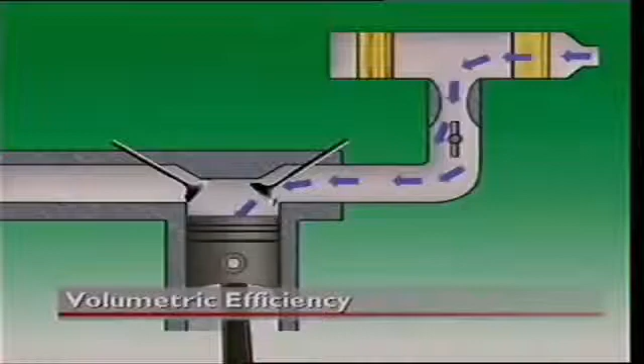Volumetric efficiency compares the volume of air entering a cylinder during intake to the internal volume of the cylinder when the piston is at bottom dead center. It is usually expressed as a percentage. In a naturally aspirated engine, one without forced induction, volumetric efficiency can never be 100%. This is because of the resistance to airflow that occurs at the carburetor, manifold, and the intake valve.

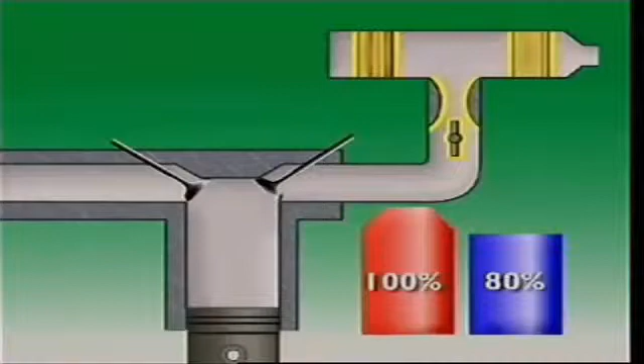With forced induction, the incoming air is compressed so that a greater volume and mass of air is forced into the cylinder during the intake stroke. That takes the volumetric efficiency to above 100%.

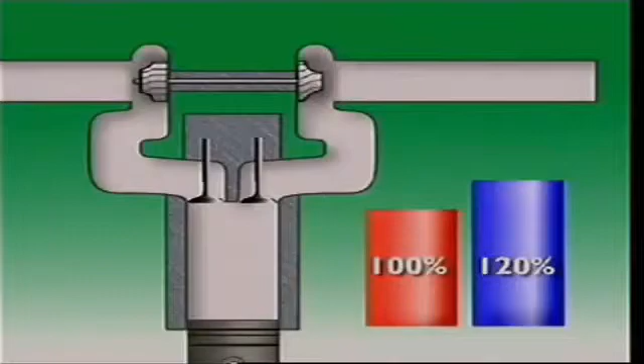Sound travels through the air by producing pressure waves, areas of high pressure and areas of low pressure. The rate at which these waves reach our ears is called frequency. It is measured in cycles per second, where a cycle is the distance between waves or wavelengths. The higher the frequency, the higher the pitch of the sound.

The range of human hearing is approximately from 20 cycles per second to 20,000 cycles per second. An engine produces sounds across a wide range of frequencies. The mufflers and resonators in the engine exhaust system reduce these sounds to an acceptable level.

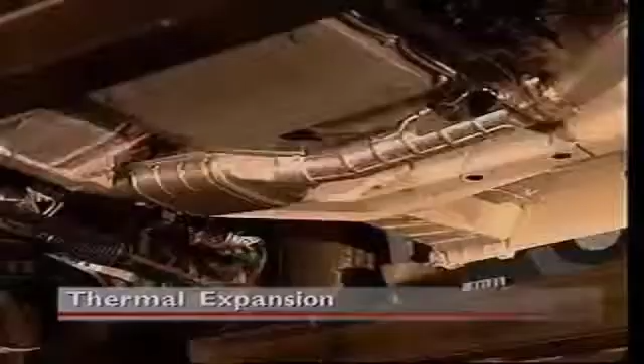Thermal expansion refers to the way some materials expand when they are heated. The same amount of heating can produce different amounts of expansion in different substances. Components that are subject to heating have to allow for this expansion in their design. An engine exhaust system is subjected to very hot exhaust gases, so its components expand and contract as they heat and cool. Mountings in the system are designed to allow this to happen.

A resonance is a form of echo. Sound waves or vibrations in one object cause sound waves or vibrations to occur in another. The induced vibration is sometimes called a sympathetic vibration, and the second object is said to resonate.

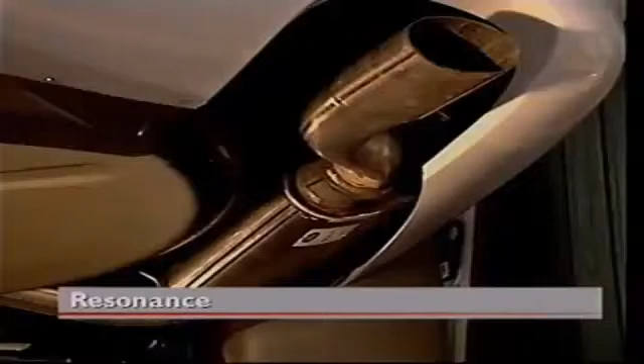It can become a problem if the sympathetic vibration adds to the original vibration. In an exhaust system, that means more sound waves, which means more noise. To reduce this, a resonator is fitted in the exhaust to act as a sound dampener and reduce the effects of the resonating sound waves.

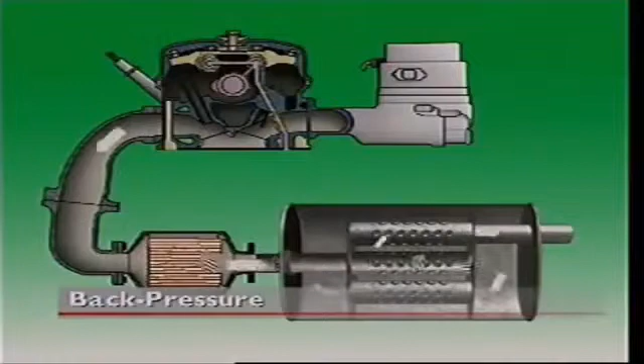Back pressure in an exhaust system refers to a buildup of pressure in the system that interferes with the outward flow of exhaust gases. This area of high pressure acts as a kind of wall to stop gas flow. It can be caused by a blockage in a muffler or a similar restriction.

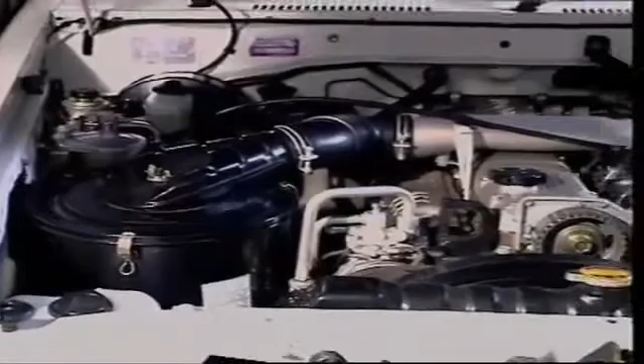This section examines the diesel induction system, beginning with the four-stroke engine. The two main components of the intake system are the air cleaner and the intake manifold. But in a diesel engine, since fuel is delivered separately and the intake system carries air only, there is less restriction in the intake of air than in a carbureted system. Also, since the diesel engine doesn't have a carburetor, it has no throttle plate. Some diesels use a pneumatic governor with a butterfly valve at the entrance to the inlet manifold.

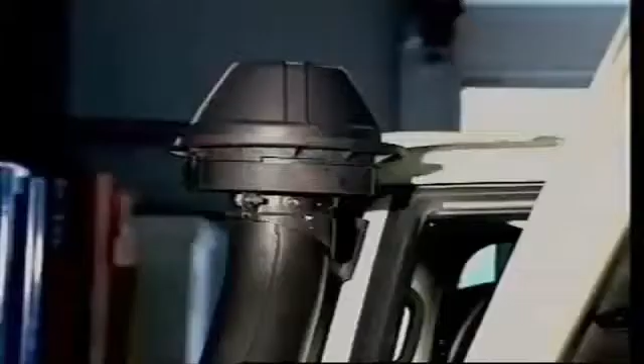Diesel engines often have more than one air cleaner. The intake system of the diesel engine can be used to increase engine output. This can be done by increasing volumetric efficiency, that is, by increasing the amount of air that enters the cylinders. Output can also be improved by using large, free-flowing intake manifolds, and by increasing the number or the size of inlet valves per cylinder to admit more charge into the combustion chamber.

Another method is to use forced induction or supercharging to pressurize the intake air and force more air into the cylinders.

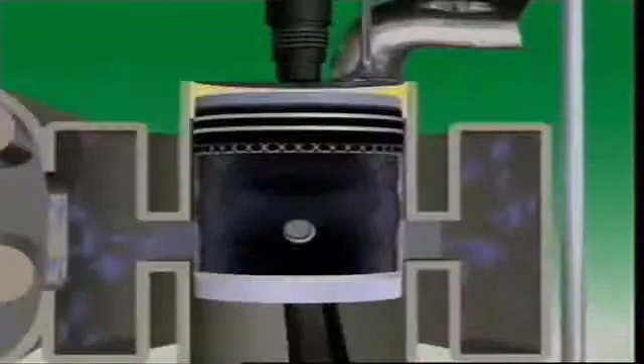Let's look at the intake system for a two-stroke diesel engine. There is only a very short time at the end of its power stroke to scavenge the exhaust gases and refill the cylinder with air.

To achieve this in the time available, two-stroke diesels use an engine-driven air pump, usually called a blower. It pressurizes the air so that when the inlet ports open, air from the blower enters the cylinder and helps scavenge the exhaust gases. Some two-stroke diesel engines use a turbocharger, which feeds air under pressure to the blower.

This section examines carbureted intake systems.

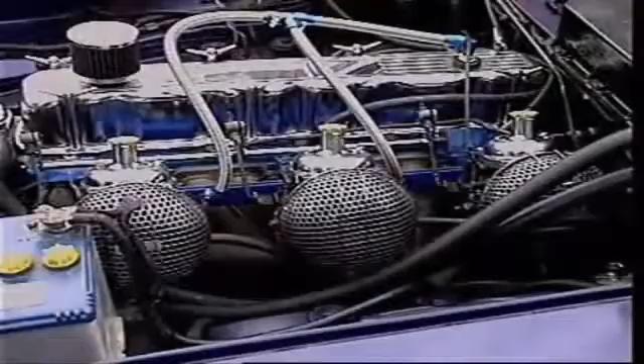On a carbureted engine, the intake system is part of the fuel system. Its main function on a petrol engine is the delivery of the required amount of the mixture of air and fuel.

In a basic system, air enters the air cleaner for filtering, then passes into the carburetor, where it mixes with the required amount of fuel. This air-fuel mixture then enters the intake manifold and finally the cylinder.

The same basic principle applies on the rotary engine.

On all carbureted systems, the intake system can be crucial in increasing engine output. This can be done by increasing volumetric efficiency, that is, by increasing the amount of air that enters the cylinders.

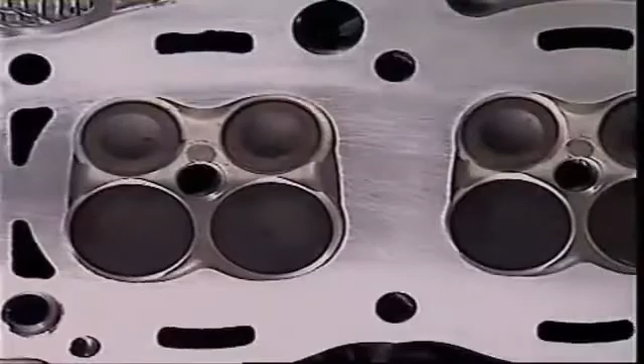This can be achieved by using a large inlet valve or multiple valves to admit more charge into the combustion chamber, by using large free-flowing intake manifolds, and by using extra carburetors.

This section examines the electronic fuel injection intake systems for petrol engines.

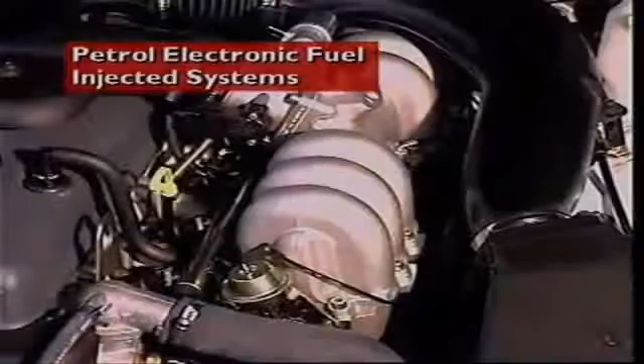The intake system is part of the fuel system. Its main function on a petrol engine is to deliver the required amount of air-fuel mixture. Air is filtered by passing through an air cleaner.

Information from many parts of the engine is fed into an electronic control unit, which then determines how much fuel should be injected for those exact conditions. Fuel is supplied under pressure from an electric pump to electronically controlled injectors.

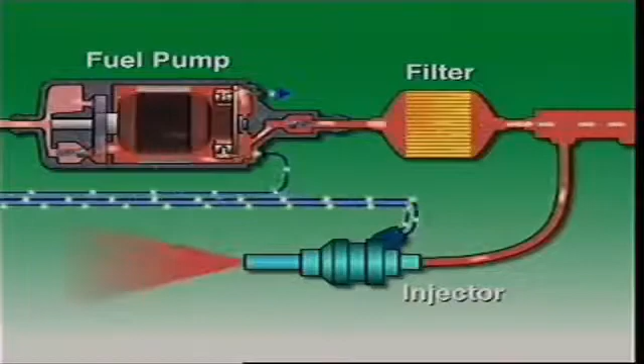There are two basic electronic fuel injection systems, single point and multi-point.

In the single-point system, the intake manifold carries an air-fuel mixture. Fuel is sprayed into the top center of the intake manifold. This manifold is similar to that on a carbureted system.

In a multi-point system, the intake manifold carries air only. Multi-point injection has a fuel injector in each inlet port going to each cylinder. Petrol is sprayed into each port in front of the intake valve.

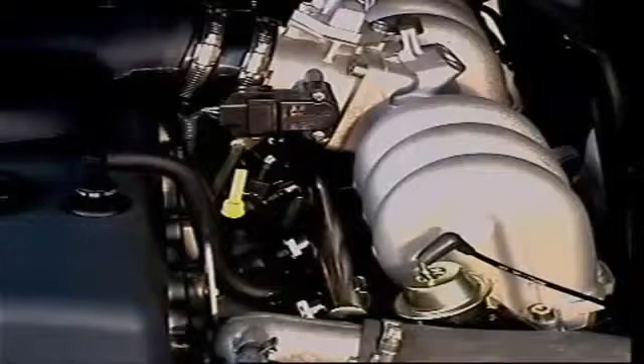The intake system can be crucial in increasing engine output. This can be done by increasing volumetric efficiency, that is, by increasing the amount of air that enters the cylinders. In fuel injection systems, this partly occurs automatically because of the increased efficiency of fuel injection compared to carbureted systems.

Output can also be improved by using large, free-flowing intake manifolds, and by using larger valves to admit more charge into the combustion chamber. Another method uses forced induction or supercharging to pressurize the intake system and force more air into the cylinders.

This section examines the diesel induction system, beginning with the four-stroke engine. The two main components of the intake system are the air cleaner and the intake manifold.

But in a diesel engine, since fuel is delivered separately and the intake system carries air only, there is less restriction in the intake of the air than in a carbureted system.

Also, since the diesel engine doesn't have a carburetor, it has no throttle plate. Some diesels use a pneumatic governor with a butterfly valve at the entrance to the inlet manifold. Diesel engines often have more than one air cleaner.

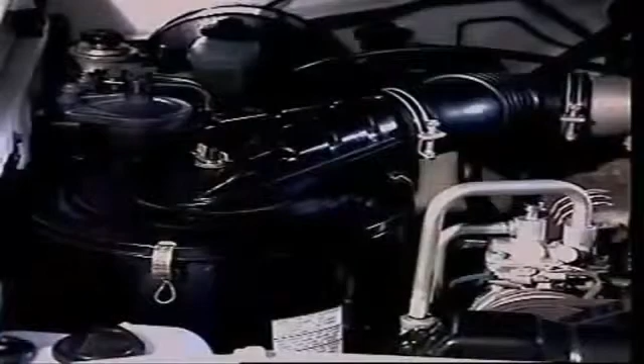The intake system of the diesel engine can be used to increase engine output. This can be done by increasing volumetric efficiency, that is, by increasing the amount of air that enters the cylinders.

Output can also be improved by using large, free-flowing intake manifolds, and by increasing the number or the size of inlet valves per cylinder to admit more charge into the combustion chamber.

Another method is to use forced induction or supercharging to pressurize the intake of the air and force more air into the cylinders.

Let's look at the intake system for a two-stroke diesel engine. There is only a very short time at the end of its power stroke to scavenge the exhaust gases and refill the cylinder with air.

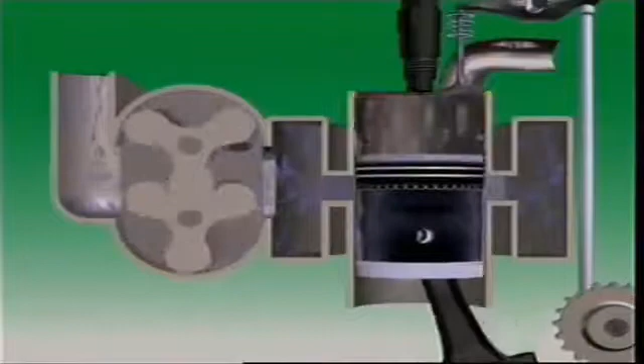To achieve this in the time available, two-stroke diesels use an engine-driven air pump, usually called a blower. It pressurizes the air so that when the inlet ports open, air from the blower enters the cylinder and helps scavenge the exhaust gases. Some two-stroke diesel engines use a turbocharger, which feeds air under pressure to the blower.

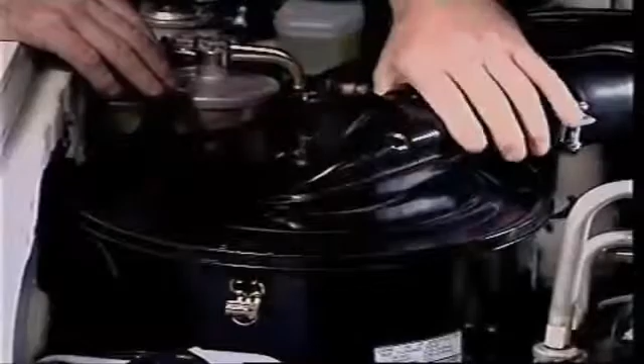This section examines air cleaners. An air cleaner filters air that passes through it to stop harmful particles reaching the engine.

The air cleaner on a carbureted engine can be on top of the carburetor, or beside the engine, connected to the carburetor by a hose or duct. Position is usually decided by how much space there is, or bonnet profile.

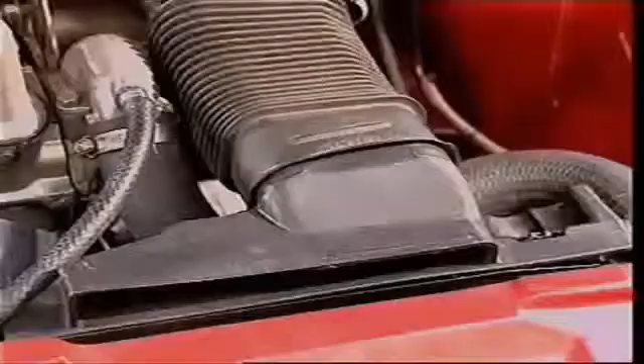On some electronically fuel-injected engines, the air cleaner is on top of the throttle body, similar to a carburetor. Other air cleaners are connected by ducts.

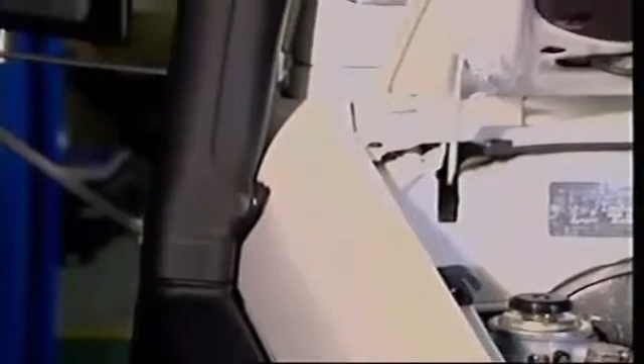Diesel engines often have more than one air cleaner. This may be due to their severe working conditions. They're usually mounted away from the engine to obtain cleaner, cooler air.

A lot of air passes through the intake system into the engine. In a petrol engine, it's about 15 times the amount of fuel by weight. By volume, that's about 9,000 times more air than fuel.

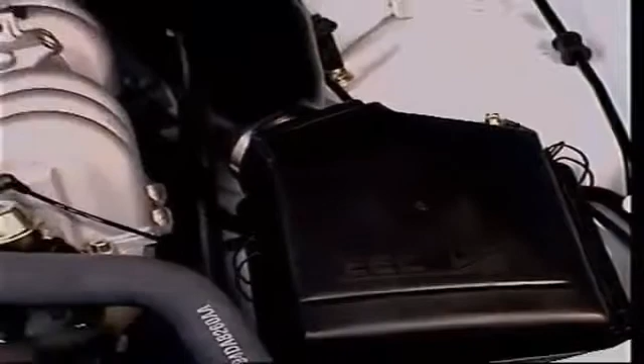The air-fuel mixture enters the engine, so the air needs to be clean. Any abrasives that enter the engine can cause wear and damage.

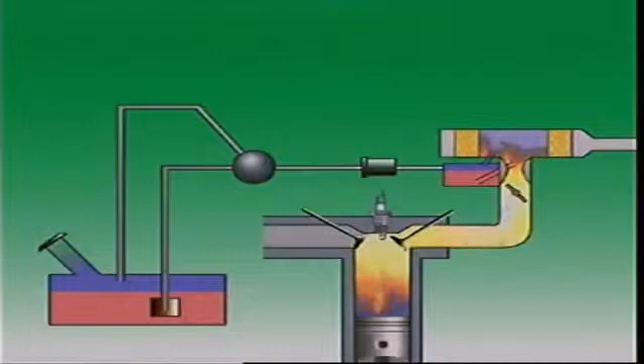It also has a silencing effect, muffling noise produced by the air entering the engine. It can act as a flame trap, so if a petrol engine backfires, the air cleaner can contain the flame within the intake manifold or the carburetor.

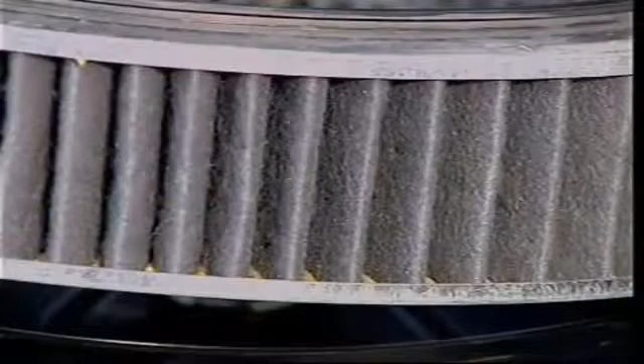The most common air cleaner is called a dry element type. It has a replaceable dry element of pleated paper or cellulose fibre that doesn't need to be wet or use oil to act as a filter. The paper is pleated because that gives a much larger surface area in the space. The element is designed to be fine enough to trap impurities, but porous enough to let air through easily.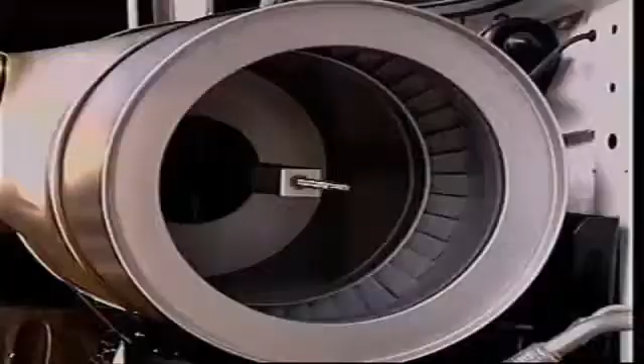Most heavy-duty air cleaners incorporate a cyclone-type pre-cleaner. It collects larger particles from the air before it enters a dry element cleaner. It can be mounted directly onto the air cleaner unit, or the cyclone principle can be incorporated into the main air cleaner element.

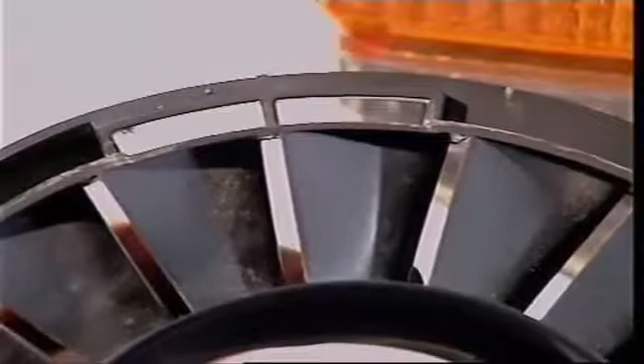This dry element cleaner is fitted close to the engine and is linked to the cyclone system by a duct. The name cyclone comes from angled vanes that give the incoming air a swirling motion. Centrifugal force throws the heavier dirt particles outwards.

In the single unit cyclone element, it collects at the end of the air cleaner case, where it can be emptied out manually or automatically. The air then continues into the dry element air cleaner. An efficient cyclone pre-cleaner can remove up to 90% of particles before they reach the main element.

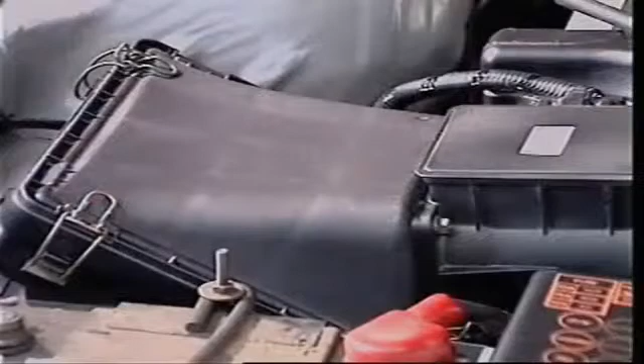An air cleaner on a multi-point electronic fuel-injected engine usually has a different shape from that on a carbureted engine, but it serves the same purpose. In many vehicles, the air cleaner is mounted where it can get cool, clean air. This air is then carried to the throttle body by a long, flexible duct.

Inside the air cleaner, a filter element of pleated paper filters the air and reduces noise. Some electronically fuel-injected systems have an airflow sensor after the air cleaner element. It accurately measures all air entering the engine and adjusts the air-fuel mixture accordingly. So it's essential there are no air leaks, or it will upset this mixture.

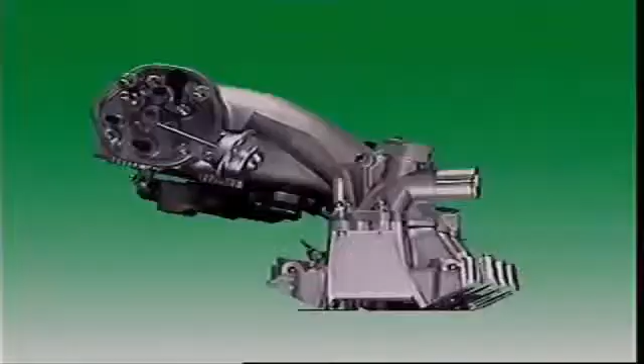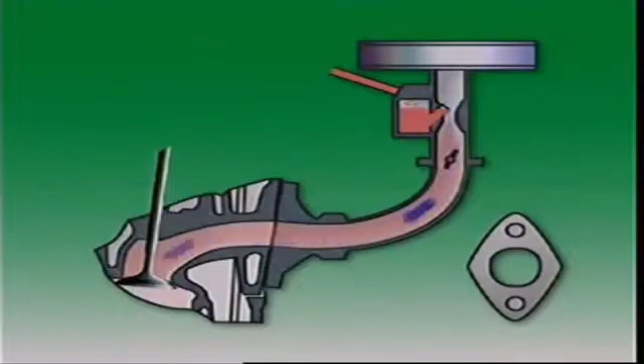This section examines intake manifolds. The intake manifold is usually a metal casting with several tubular branches, though it can also be made of a special plastic. In carbureted engines, the intake manifold carries the air-fuel mixture into the engine. The cross-sectional area of each tube needs to be kept small to maintain the high air speeds that improve vaporization. At the same time, it cannot be too small, since that restricts the airflow to the engine at higher speeds.

Electronic fuel-injected engines with throttle body injection also have intake manifolds that carry air-fuel mixture. With multi-point injection, the intake manifolds carry air only, and the cross-sectional area of the tubes can be larger. More air can flow and the engine can produce more power. Fuel is injected into the intake ports of the cylinder head.

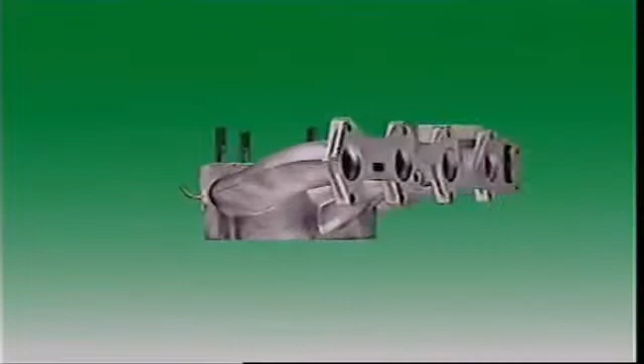This cylinder head has intake and exhaust manifolds for a 4-cylinder carbureted engine. It is a cross-flow head. That means the intake manifold is on one side and the exhaust manifold is on the other. On many cars, the intake manifold has a mounting for the carburetor and a flange that bolts onto the cylinder head. It has a branch for each cylinder to carry air-fuel mixture into the combustion chamber.

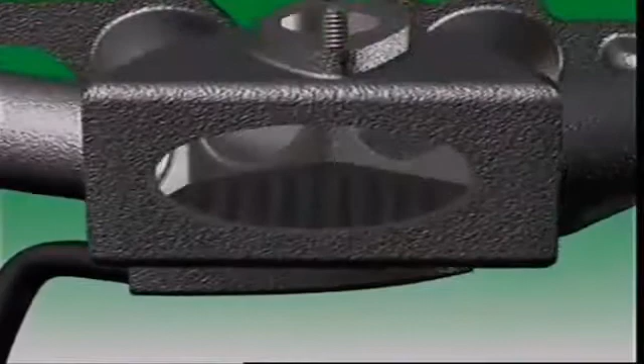This intake manifold has a water jacket under the carburetor mounting. Hot coolant from the cooling system flows through the water jacket and heats the manifold. Heating is required in a carbureted engine to provide better vaporization of the air-fuel mixture.

This fuel-injected engine manifold has a plenum chamber that provides a reservoir of air and helps prevent interference with the flow of air between individual branches. It also acts as a silencer.

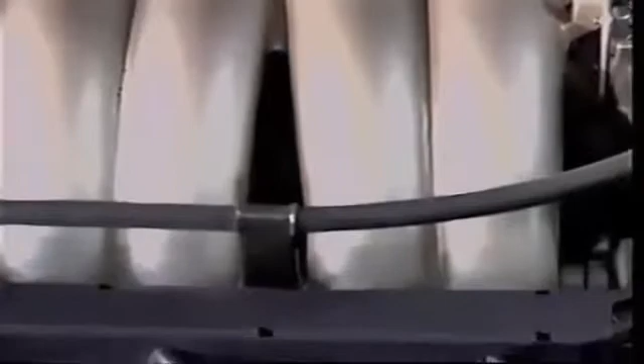On this primary manifold, the intake pipes are fixed in length. Other kinds of manifolds have extra valves to change the effective pipe length. They may be computer controlled by the engine management system to open at a specified engine speed and extend the torque output.

A diesel engine intake manifold carries air only, not fuel, and since no fuel is vaporized in the manifold, it isn't heated. Some diesels use a pneumatic or air-operated governor with a butterfly valve at the entrance to the inlet manifold. This butterfly valve is only used to operate the governor. It is not a throttle butterfly valve as seen on petrol engines.

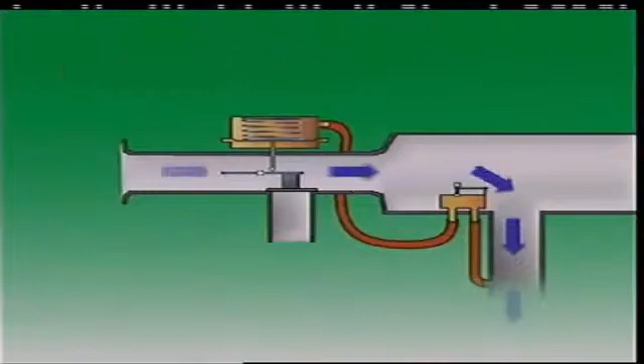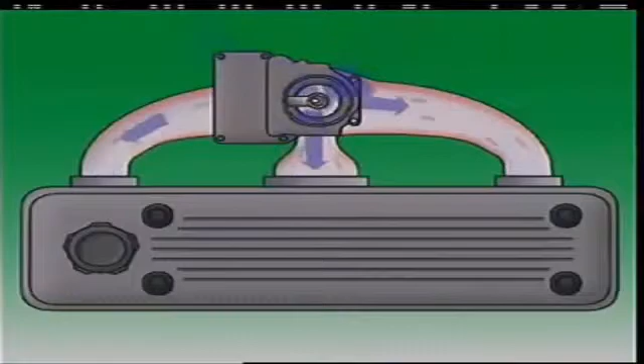This section examines intake air heating. Normally, the air entering the air cleaner is cold. Cooler air is more dense, that is, it contains more oxygen, and that should help the fuel burn more efficiently. But fuel doesn't vaporize very well in cold air.

Since an enormous amount of heat passes through the exhaust manifold, many carbureted engines capture some of it with a shroud around the exhaust manifold. This heats the incoming air to improve fuel vaporization. This heated air then enters the air cleaner.

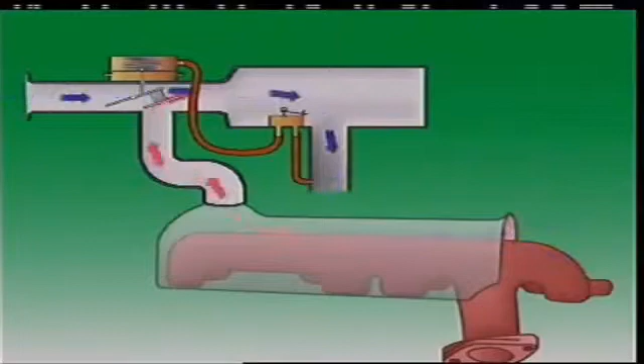Once an engine is hot, it may no longer need the incoming air to be hot, so the amount of hot air entering the engine needs to be controlled. On vehicles with emission controls, air cleaners use a valve to control how much hot air enters the air cleaner.

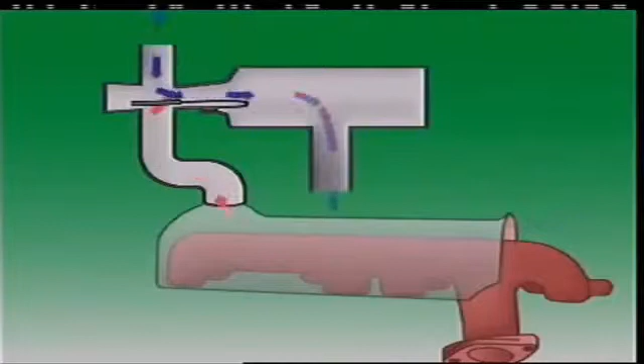This valve can be a simple thermostatic type. When the engine is started, only heated air is used. As engine temperature rises, the valve opens and provides more and more air at normal temperature. This ensures that the temperature of the air supplied to the engine stays fairly constant.

Another way to control the amount of hot air is to use a vacuum motor and a temperature-sensitive valve that is mounted inside the air cleaner unit. When a cold engine is started, this valve allows vacuum from the intake manifold to reach the vacuum motor. This unrestricted vacuum acts on a spring-loaded diaphragm attached to the control valve. The valve opens fully and admits hot air to the air cleaner.

As the temperature rises, the temperature-sensitive valve reduces the vacuum to the diaphragm. This in turn reduces the opening of the control valve and allows cooler air to blend in with hot air from the shroud.

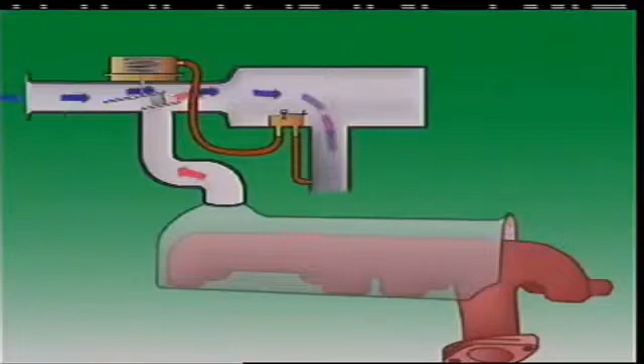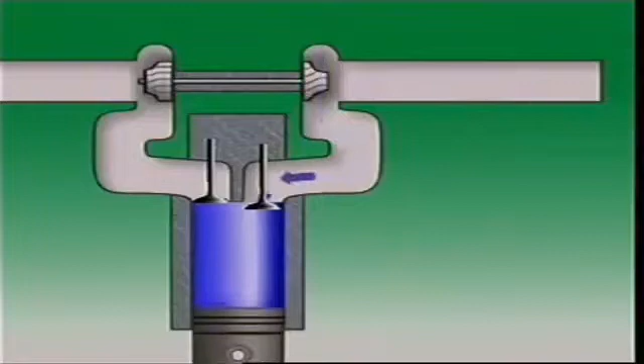This section examines forced induction. One way to improve engine output is to increase the amount of air-fuel mixture that is burned in the cylinder. That means increasing volumetric efficiency, or how much air is delivered to the engine. This is done by what is called forced induction. Forced induction increases air pressure in the intake manifold above atmospheric pressure. An engine using forced induction can have a volumetric efficiency above 100%.

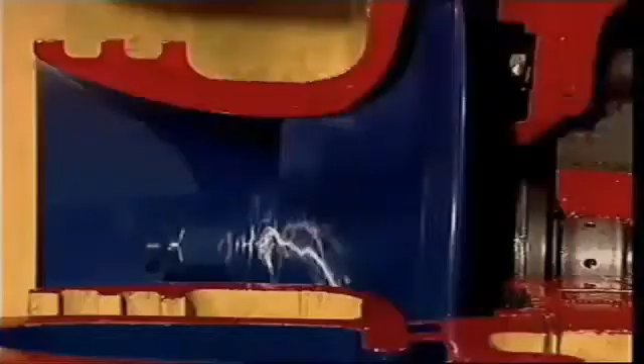A turbocharger uses energy that's normally wasted through the exhaust. Exhaust gases enter a turbine and make it spin. The more gases, the faster it spins. A shaft connects the turbine to an intake compressor. It compresses the air and forces it under pressure into the intake manifold.

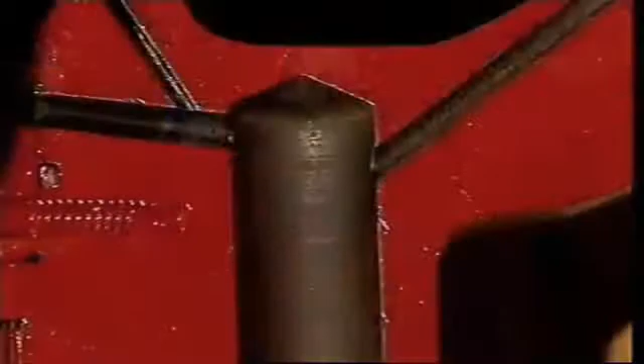The turbine operates at very high temperatures and with the compressor can rotate at well over 100,000 revolutions per minute. So they both need a good supply of clean oil to lubricate their bearings and carry heat away. Some engines also supply coolant to the turbocharger body to improve cooling.

On petrol engines, higher and higher engine speeds mean more and more exhaust gases, and that makes the turbocharger force more and more air into the cylinders. This can damage the engine.

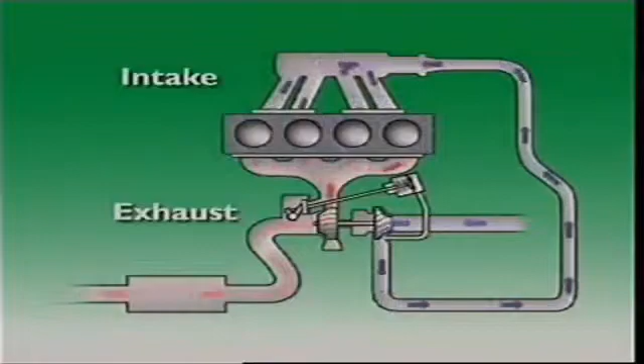To control this, a device called a wastegate is fitted to the exhaust inlet of the turbocharger. When air pressure in the intake manifold reaches a preset level, it automatically directs exhaust gases away from the turbocharger. The wastegate can also be computer controlled to reduce intake air pressure in the event of detonation or knocking. An emergency relief valve may also be fitted so that if the wastegate should fail, it can prevent an abnormal rise in manifold pressure.

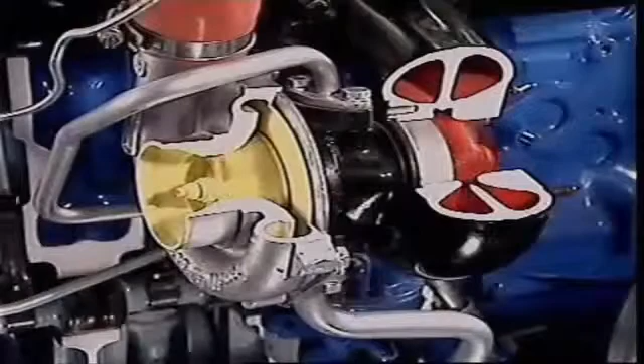Since the turbocharger uses the energy of the exhaust gases, there is a short delay between when the driver opens the throttle and when maximum power is available. This is turbo lag, and on larger engines it's quite noticeable. Because a turbocharger recycles heat energy that would otherwise be lost to the engine, it can seem to be offering additional energy for nothing. But a turbocharger can introduce problems of its own.

The extra heat and power it generates can put an extra load on the engine's cooling and lubrication systems. This is provided for by the manufacturer.

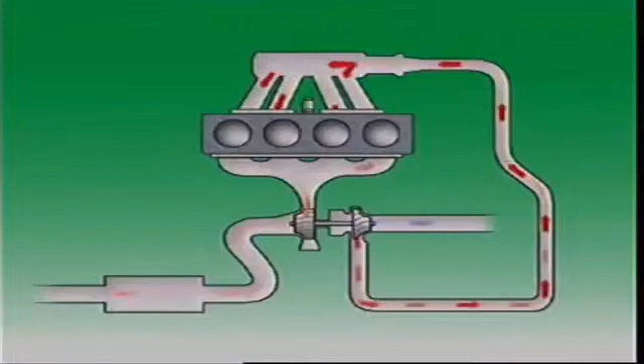As the air passes through the turbocharger, it heats up. But hot air is less dense than cool air, so it tries to expand again, and some of the benefits of compressing it are lost. To stop this and improve efficiency, some engines use an intercooler to cool the compressed air. It fits between the turbocharger and the engine. It's usually air-cooled.

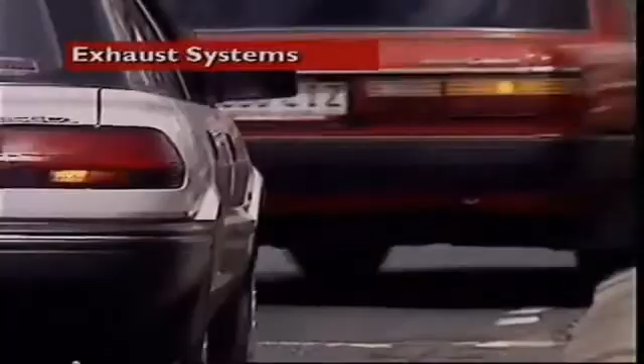This section examines automotive exhaust systems. During engine operation, each time the exhaust valve opens, pulses of hot exhaust gases are forced into the exhaust manifold. These hot, rapidly expanding gases produce a lot of noise, some of it at very high frequency.

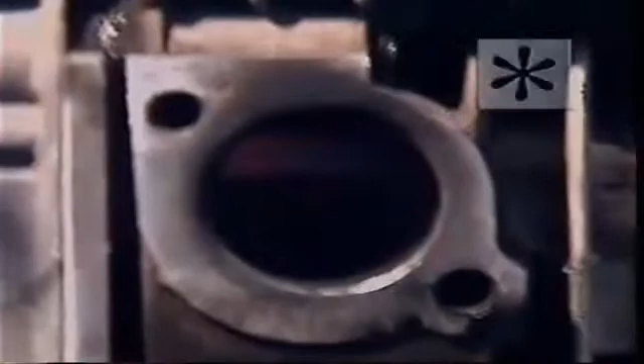The exhaust system does several jobs. It has to reduce the noise of the exhausting gases to acceptable levels. It has to discharge the gases safely, far enough away to prevent them re-entering the vehicle. Some of these gases are highly poisonous. In an enclosed space, carbon monoxide can cause death in minutes. It is odorless and colourless, which makes it difficult to detect, and removing it is especially important.

In modern vehicles, the exhaust system also assists in keeping harmful emissions to a minimum. The exhaust system is designed to enhance engine operation. A well-designed system can improve drivability and performance.

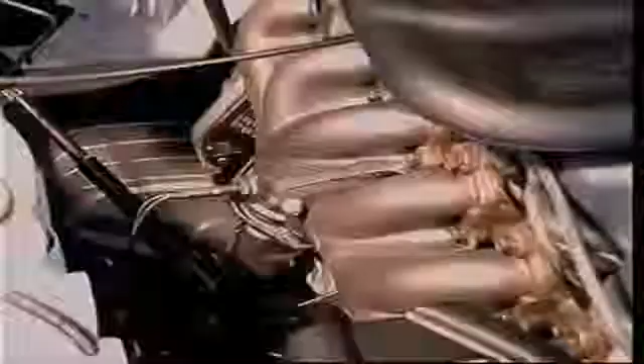In this simplified model, burned gases exit the engine through the exhaust port and pass into the exhaust manifold. The first pipe is usually called the engine pipe. It is connected to the outlet of the manifold, which carries the exhaust gases to the muffler, which reduces exhaust noise. Exhaust gases are then discharged through a tailpipe, usually at the rear or sometimes above the vehicle.

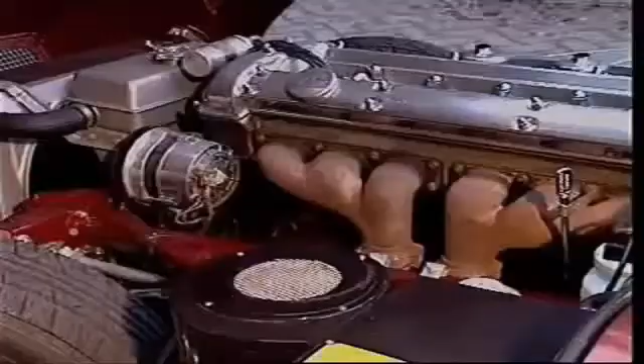This section examines the exhaust manifold. The exhaust manifold is bolted to the cylinder head at the outlet of the exhaust ports. On passenger vehicles, the exhaust manifold is usually made of cast iron.

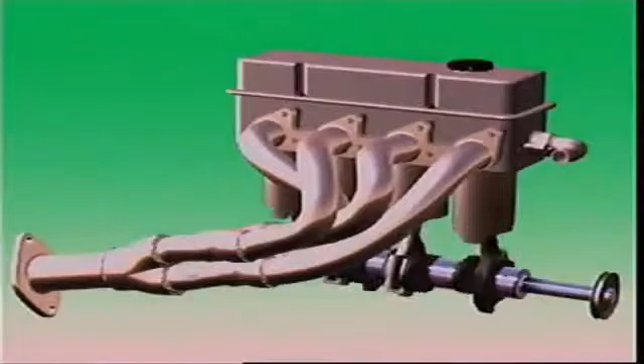Sometimes there is a separate passage for each exhaust port. The length of the passages in the exhaust manifold should be designed so that pulses of exhaust gases from one cylinder assist the flow of gases from another. It has large tubular sections to improve gas flow, and no sharp bends to slow the gases down.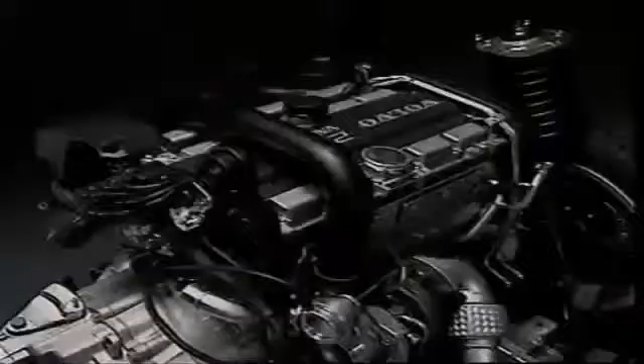The exhaust manifold must also be shaped to allow for the location of the engine and the bodywork of the vehicle. Some vehicles use heat shields to protect nearby components and the passenger compartment from the heat radiated from the exhaust components.

This section examines exhaust pipes. The engine pipe is attached to the outlet of the exhaust manifold. It can be designed to branch in various ways. On this engine, the exhaust gas from 3 cylinders is fed into each engine pipe.

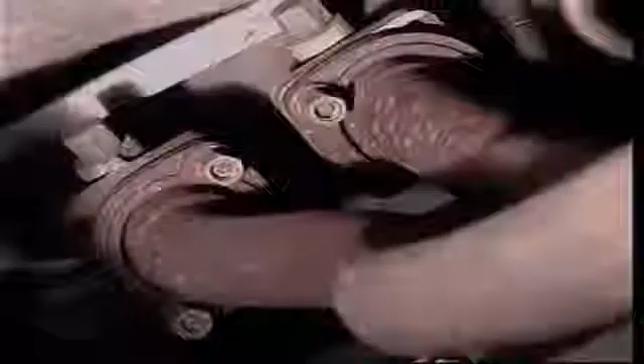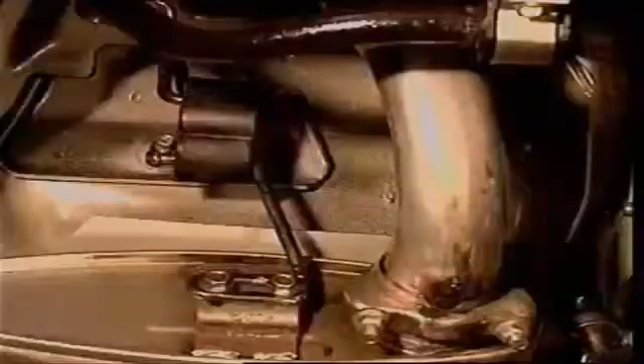The system needs flexible mountings and sometimes flexible joints to allow for engine movement and prevent noise and vibration being transmitted into the vehicle body. On some front-wheel drive systems, the exhaust system is designed to be strong enough to form part of the engine mounting system. Rubber mountings are popular because of rubber's natural dampening effect. They also allow for thermal expansion during use.

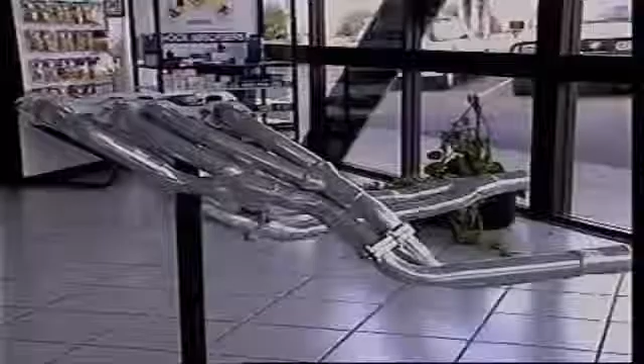This section examines extractors. Some exhaust systems have extractor pipes, sometimes called headers, one pipe for each exhaust port. They are designed with sweeps that stop restriction. The extractor pipes also provide a scavenging effect, helping remove exhaust gases from the cylinders.

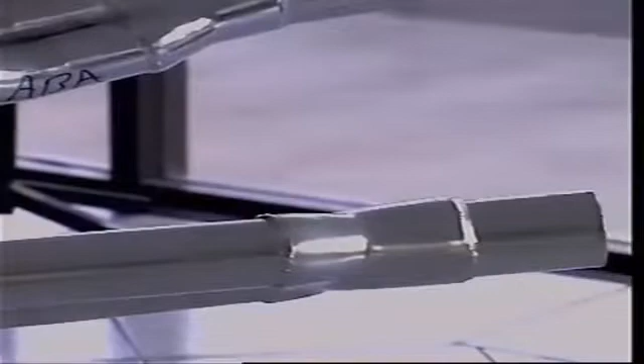The outgoing pulse from one cylinder is timed to arrive at the junction at exactly the right time to help draw out the pulse from another cylinder. They are widely used on high-performance vehicles.

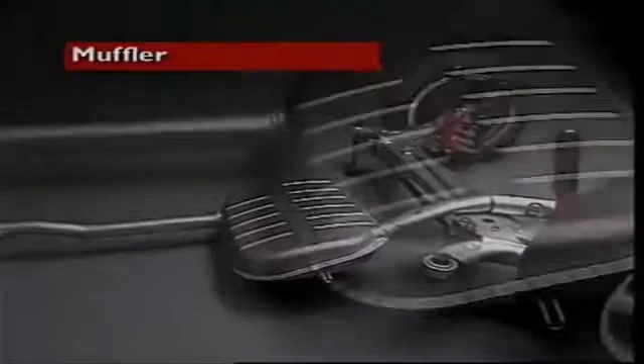This section examines mufflers. The muffler is located in the exhaust system between the exhaust manifold and the exhaust outlet. It is usually made of sheet steel coated with aluminium to reduce corrosion. Some are made of stainless steel.

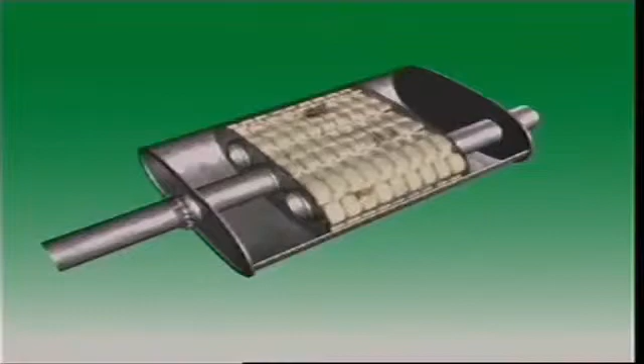A muffler contains perforated pipes, baffles and resonance chambers. Many also contain sound-absorbing materials such as fiberglass or wire wool. The muffler slows down the gases and breaks up the pulsating sound waves and so reduces the noise.

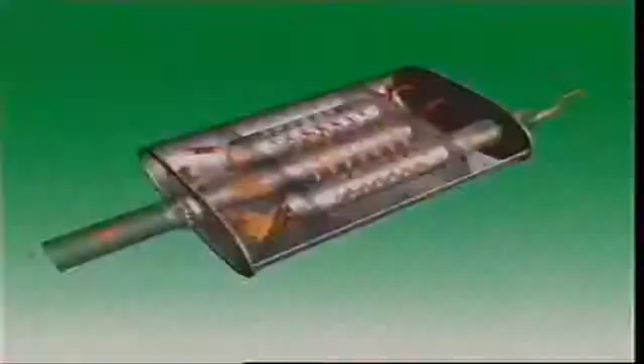It must cause as little restriction as possible. Poor design can cause excessive back pressure that will slow down the escape of the exhaust gases and reduce engine performance. Some mufflers combine baffles and pipes to change the flow of gases without restricting them.

Gases enter through the inlet and must reverse their direction of flow before they exit through the outlet. This is called a reverse flow muffler. Some mufflers use double outer skins to minimize heat and noise transmission.

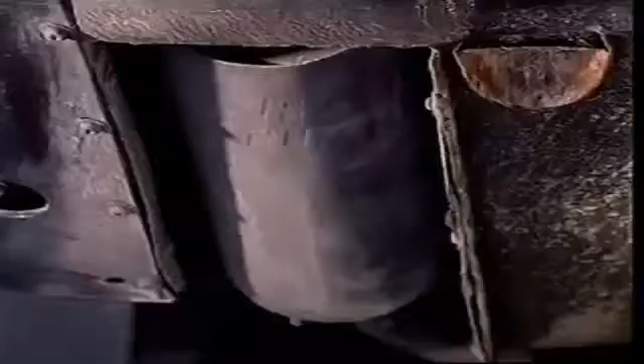Some exhaust systems use a resonator as well as a muffler. It looks like a muffler, but it usually has a straight-through design and it contains sound-absorbing material. It's designed to remove resonance levels that mufflers can't remove.

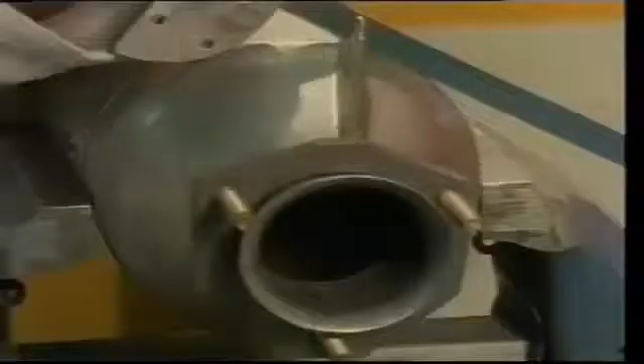This section examines catalytic converters. A catalytic converter is used to convert unacceptable exhaust pollutants such as carbon monoxide, certain hydrocarbons and oxides of nitrogen into less dangerous substances. Three-way converters convert hydrocarbons and carbon monoxide to water and carbon dioxide. They convert the oxides of nitrogen back into nitrogen and oxygen.

Older catalytic converters converted hydrocarbons and carbon monoxide to water and carbon dioxide, but were not able to convert the oxides of nitrogen. A catalytic converter fits into an exhaust system like a muffler. It is located close to the exhaust manifold so that it can reach its operating temperature as soon as possible.

Leaded fuel must not be used in an engine with a catalytic converter because lead will contaminate the catalyst and prevent it doing its job.

It operates by starting and then maintaining a chemical reaction in the exhaust gases. It usually operates at higher temperatures than a muffler. It has a heat shield to prevent heat radiating to bodywork and other parts.

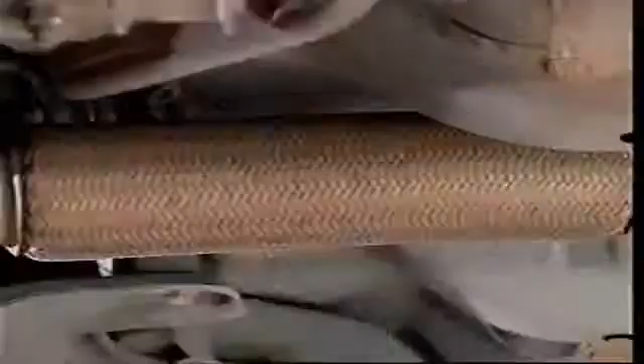This section examines flexible connections. This is a flexible connection between an engine pipe and an intermediate pipe. It is used close to the engine. Its main functions are to allow engine movement and reduce vibration without passing it along the exhaust, especially in front-wheel drive vehicles. It also helps with the alignment of the pipes.